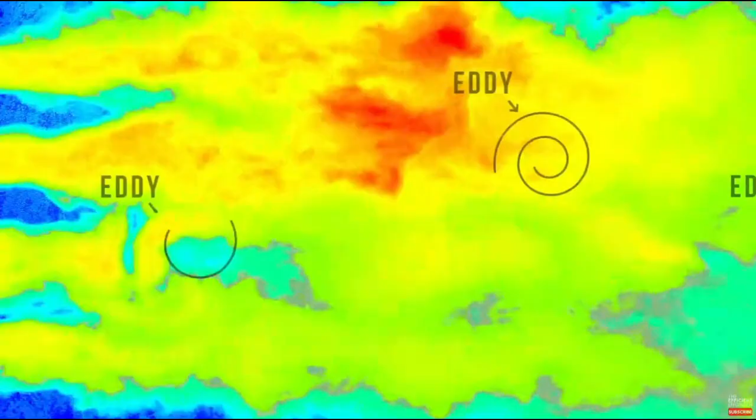This first prototype burner didn't work for a few reasons. We didn't have the fuel air mixing we needed, we didn't have the right nozzle geometry to keep the flame at the front of the burner, and we didn't realize this until later, but we didn't have a high enough fuel flow rate for the air that we were using. To make two fluids, like air and butane, mix well together, you need to induce turbulence. We did this by moving the EDF fan to the side of the burner rather than the back, and adding static mixers along its length. We ran SOLIDWORKS simulations to make sure that everything was well mixed.

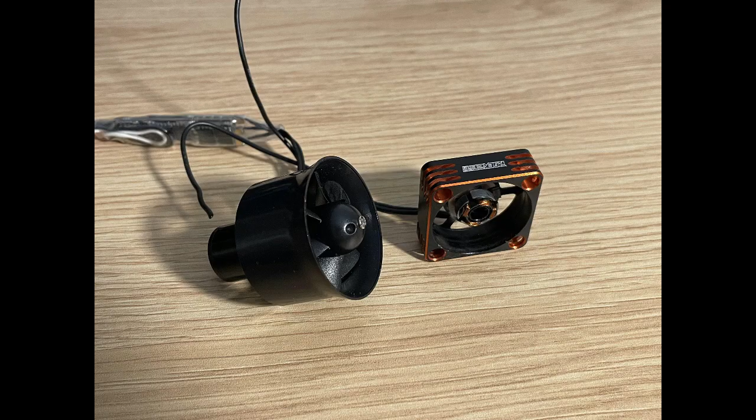Unfortunately, that design took up too much space, so we switched to this new design with 2 small RC car cooling fans instead of a large EDF for airflow. We also tried adding some fancy new nozzle geometry to swirl the butane before adding it to the mixing chamber. Let's see how these changes went. Okay, ignition. Fuel.

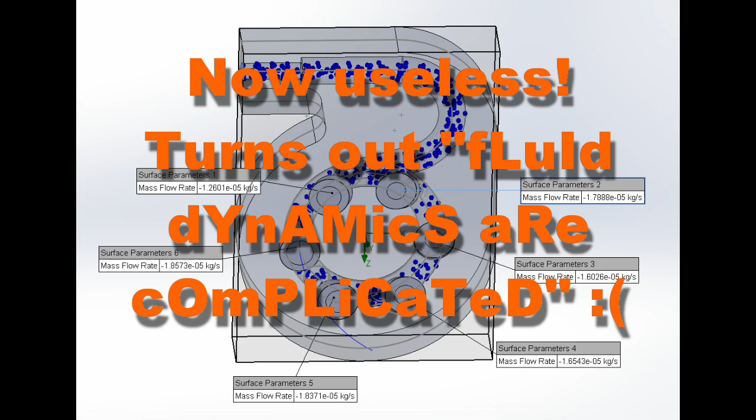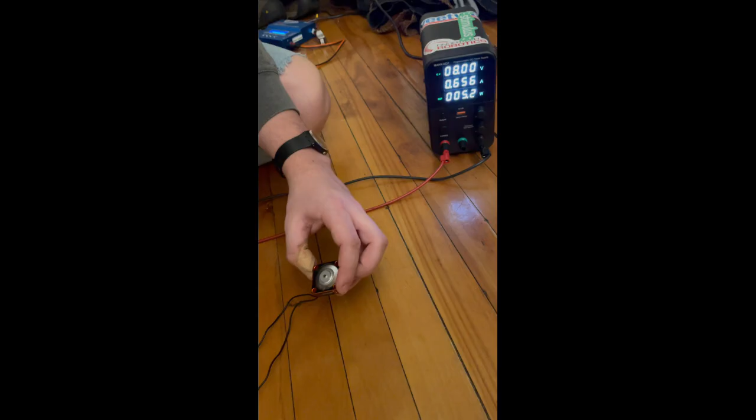This prototype had a couple issues. We quickly melted the thin plastic fan blades, and the new nozzle geometry limited our fuel flow too much. To fix the fuel flow issue, we returned to our old nozzle made of brass tubing. As for the fans melting, we decided to machine our own aluminum fans. Thanks to a couple of smooth brain moments, this took a lot longer than expected, but the final product was really cool. We ran some basic tests, and then used a wind speed anemometer to measure the velocity of the air, and found the velocity from our fan was about the same as that of an off-the-shelf plastic fan.

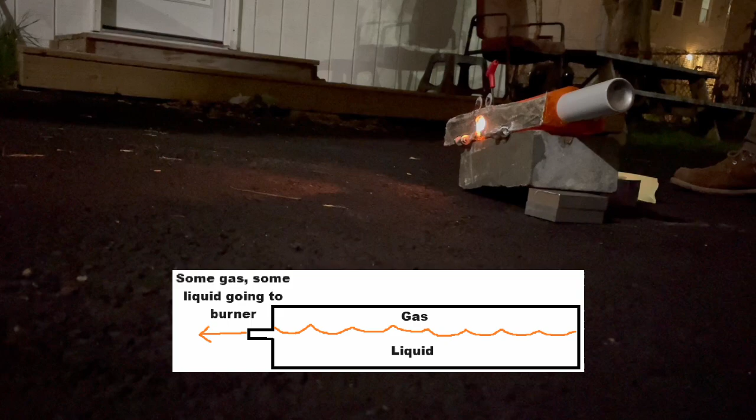With fans that didn't melt, we were able to actually get much better testing done, and we saw that we were getting a pretty close to neutral flame, but we wanted a little more range on our fire, so that led to us tilting the canister. We did this first simply by putting the robot up on bricks to see what the effect would be, and it increased our range significantly. After this, we knew that we had to tilt the canister inside the chassis to get higher fuel flow. We did this testing 48 hours before the competition, so there wasn't any time to actually make these changes. We trashed the CAD and ended up with only 1 chassis, but we were really optimistic because the fire was burning very hot.